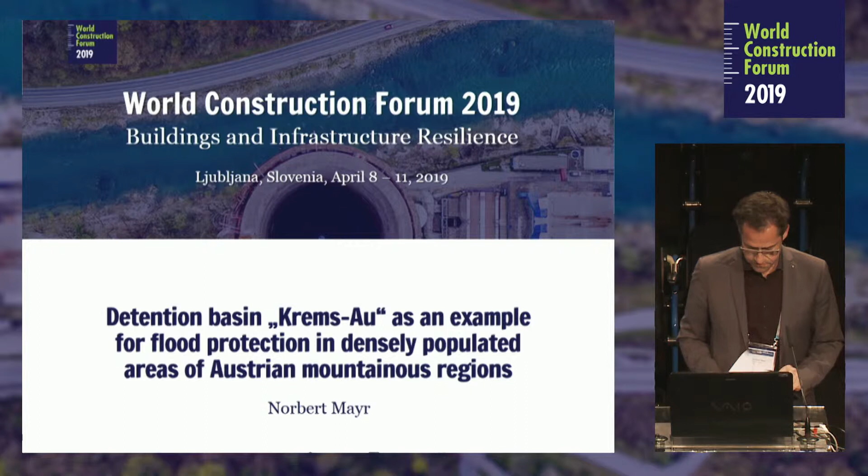Today I will tell you some hopefully interesting things before the coffee break about the project we are part of in designing and inspecting for almost 10 years now.

In 2002, a flood event in upper and lower Austria shocked the country. Many valleys in the foothills of the Alps that had been regarded as safe from submergence were flooded, and the economic damage was high since these valleys are very densely populated. One of these valleys is the river Krems in Upper Austria, where the river had been regulated in the 1960s.

After the flood, research for the reasons of the disaster was started and concepts were created. For the upper regions of the valley, a basin for flood detention was concepted. This is the reservoir Krems-Au, which I want to tell you about. One focus of my presentation is the hydrological dimensioning of the reservoir. The other one is aspects of safety and the construction and the Austrian Reservoir Commission. At the end of my presentation, you will see some photos of the building phase.

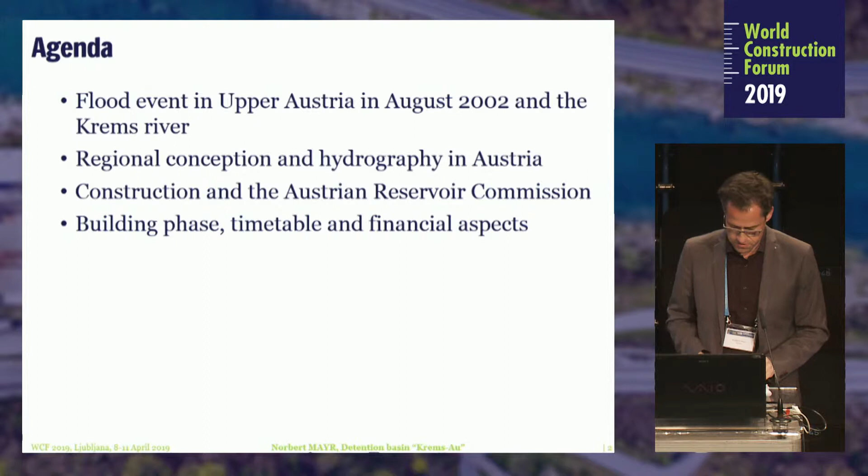I have already told you about the problems we have in these mountainous regions. The stream regulation measures of the 20th century appear as much too small. The floods in 2002 and partly also in 2013 have shown this. The challenges are to plan and build reservoirs for the mitigation of floods with dimensioning the necessary volume. The other challenge is the construction has to be safe up to very rare floods because of the dense population and industrialization in connection with the danger of flood waves that threaten human lives.

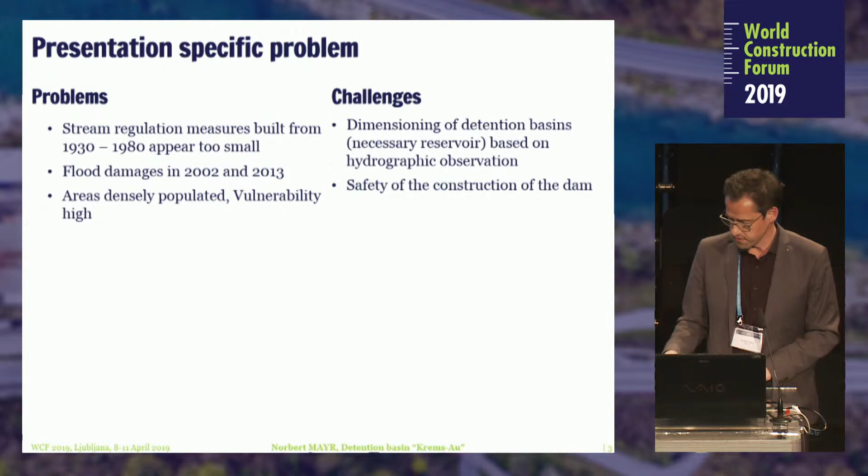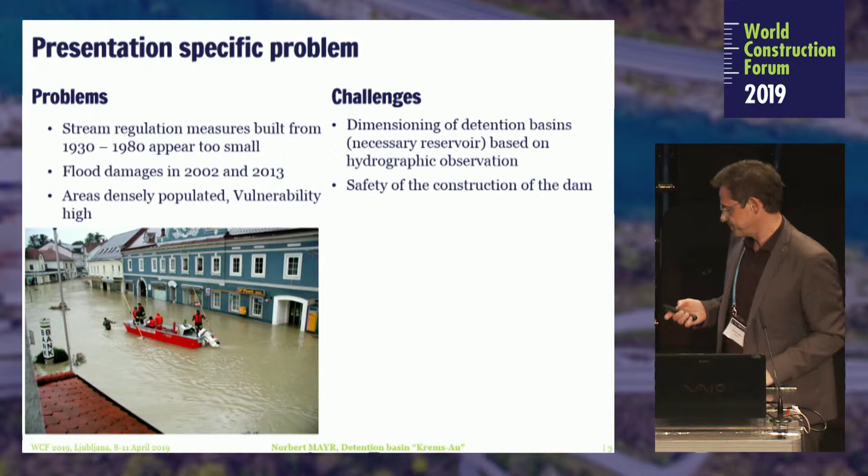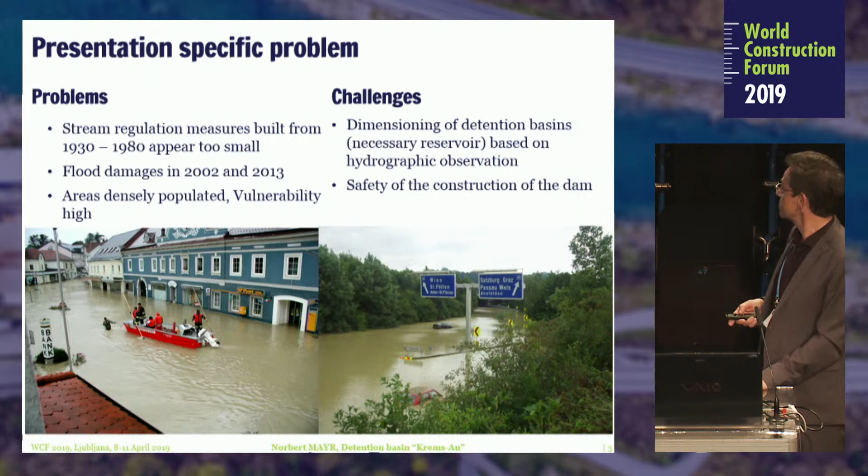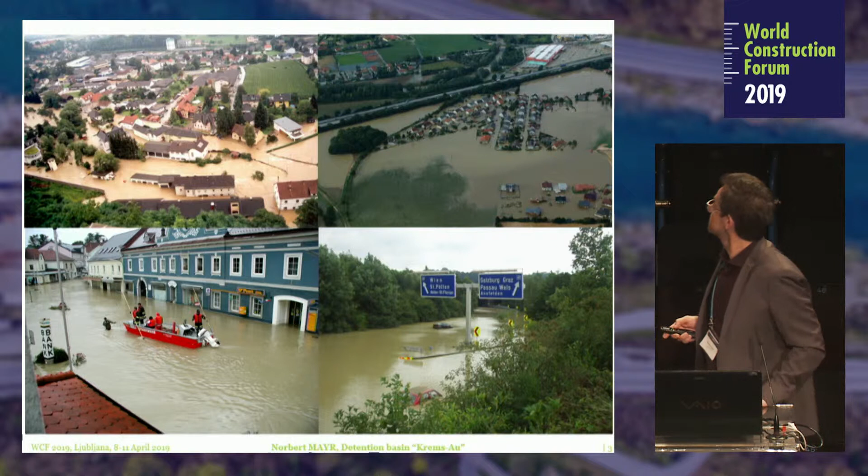Here you see some photos of the flood of 2002. This is the city of Kremsmünster. Here you see a picture of the A1 motorway, one of the most important motorways in Austria, that was flooded by the Krems. Here another picture of Kremsmünster and a settlement part of the city of Ansfelden.

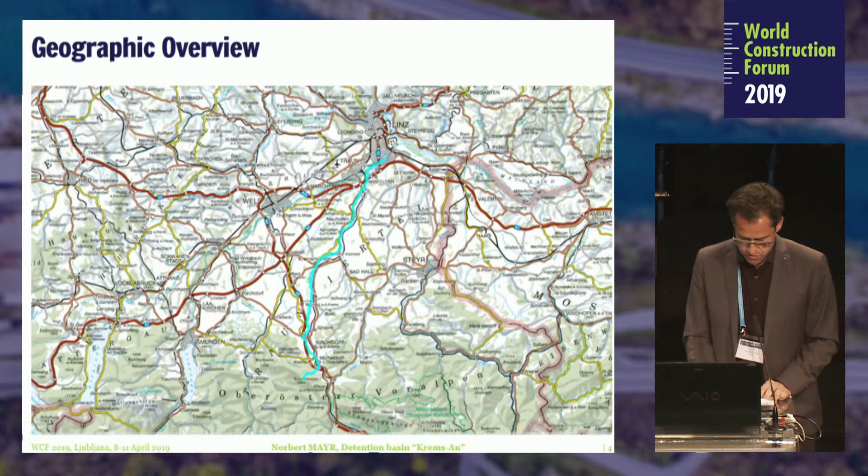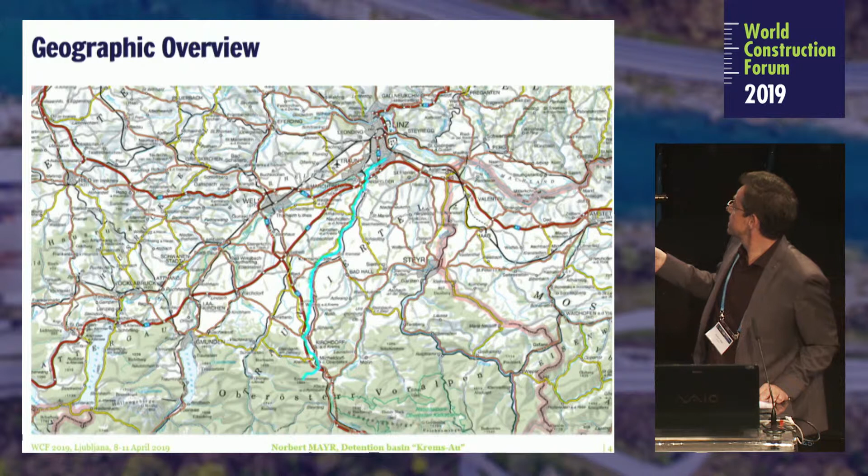A short geographic overview on this slide. You see part of Upper Austria with the Alps in the south, where the river Krems has its sources. Here you see the Krems River in light blue. The Krems flows here into the river Traun and on into the Danube. Here is the capital of Upper Austria, the city of Linz.

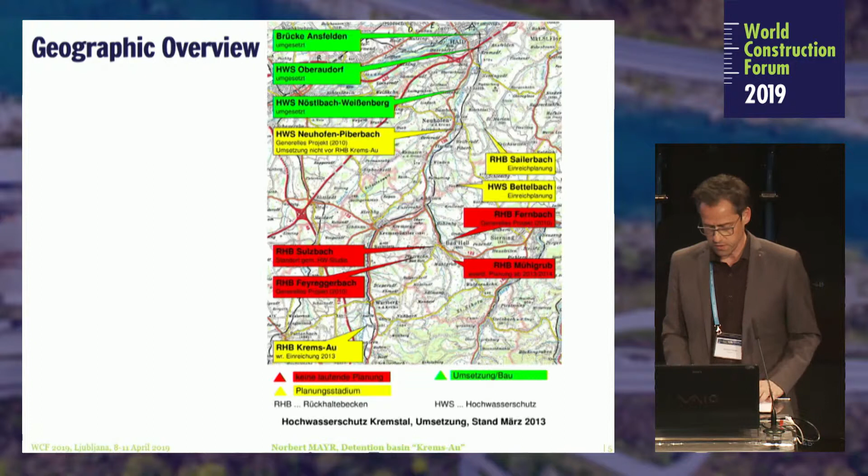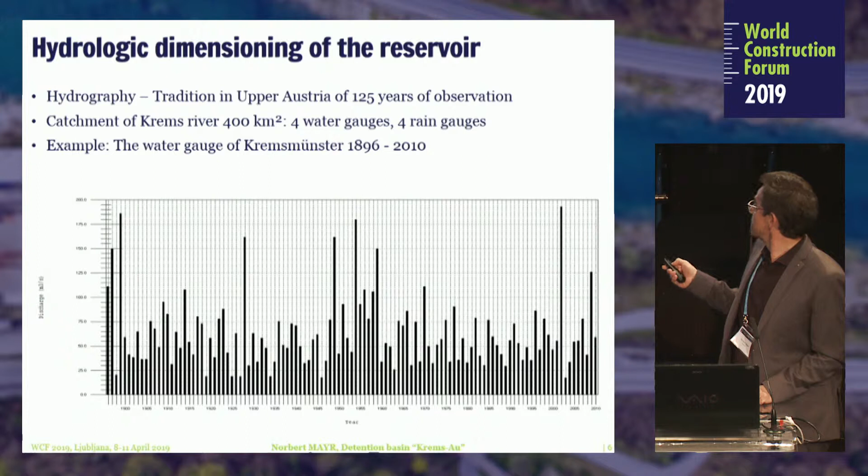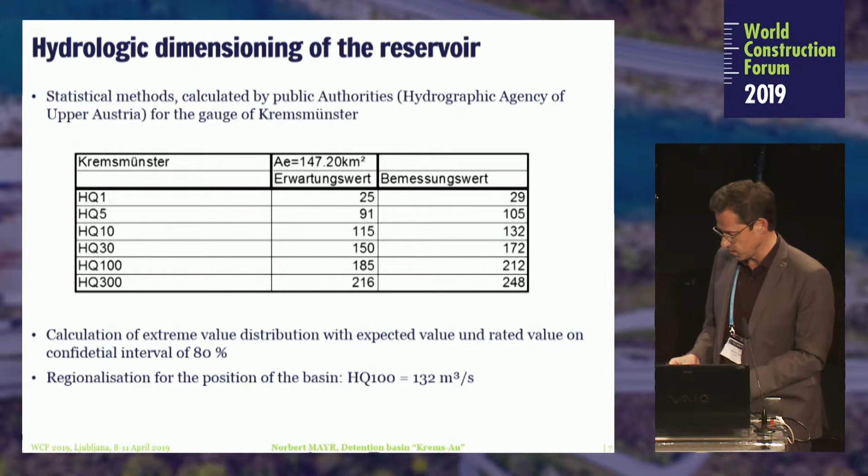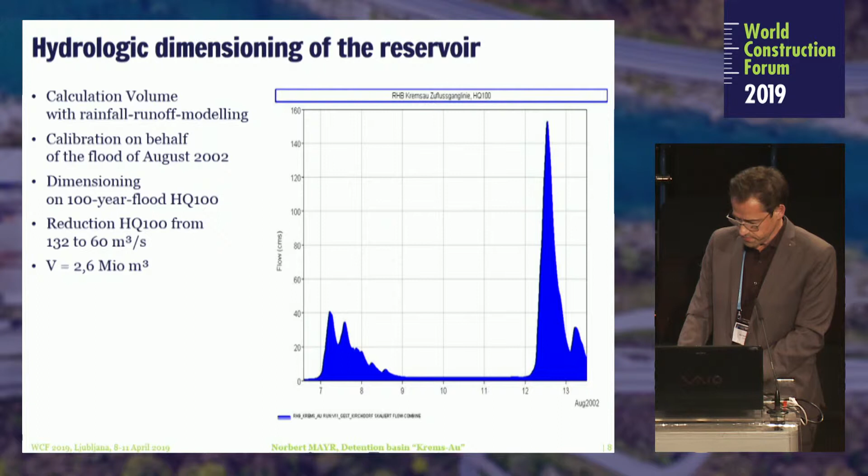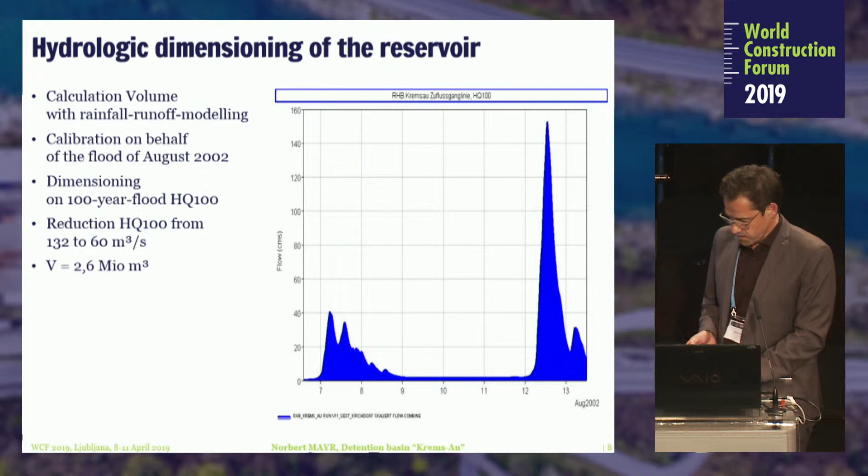The volume of the reservoir was calculated by rainfall runoff modeling. The model could be calibrated on behalf of the flood of the 12th of August 2002. The dimensioning of the volume was made for a 100-year flood, which is the usual annuality for flood management in Austria. The volume that resulted at the end of that process was 2.6 million cubic meters. On the chart you can also see the calculated hydrograph of the disastrous flood in 2002.

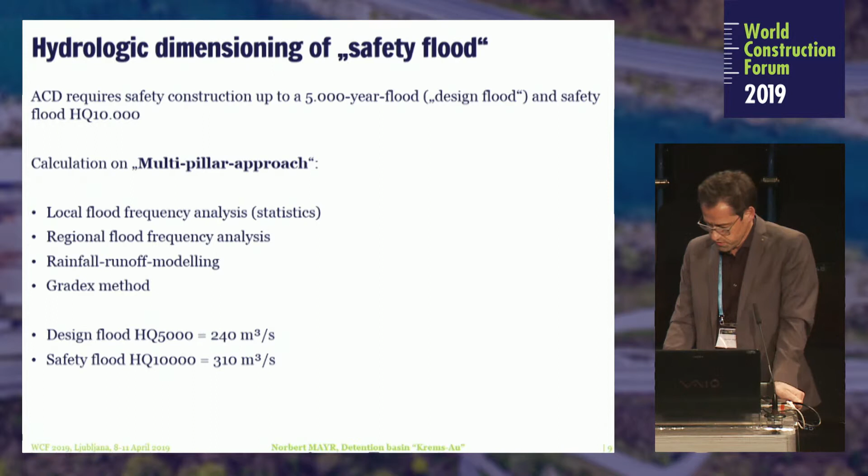For the safety construction of the dam, the Austrian Commission on Dams, ACD, requires calculating a so-called design runoff with an annuality of 5,000 and a safety flood with an annuality of 10,000. This calculation has to be made using a so-called multi-pillar approach. The runoff must be calculated by 4 different methods, and the results have to be discussed.

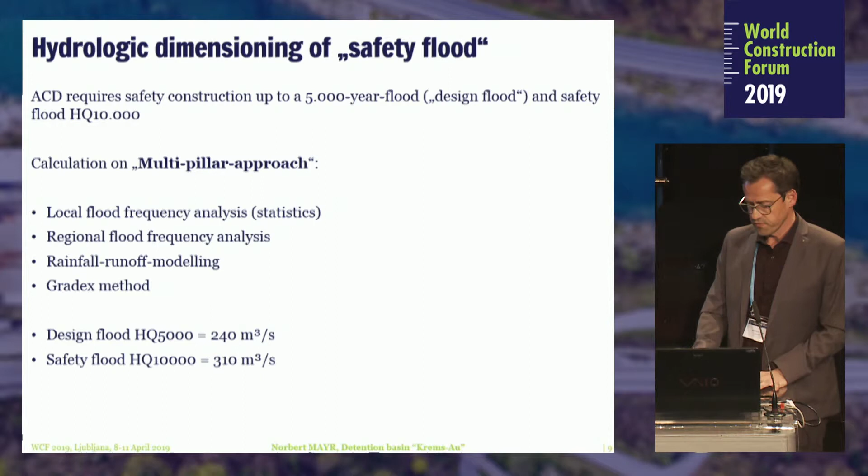In this case, we took the local frequency analysis of the water gauges Krems-Münster and so on, a completely statistical method; further, the regional flood frequency analysis, which is also a statistical method in general; further, rainfall runoff modeling; and the Gradex method. Here you see the results of the multi-pillar approach with a design flood of 240 cubic meters per second, nearly double the 100-year flood.

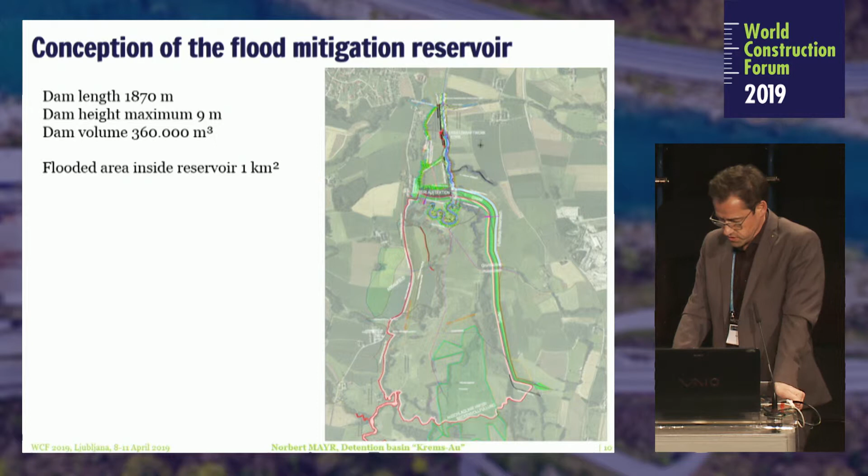So we come to another main chapter of my presentation, the construction of the dam and safety aspects. Here you see the dam with a length of 1,870 meters on the right side, on the east side, and with a height of maximum 9 meters here in the north.

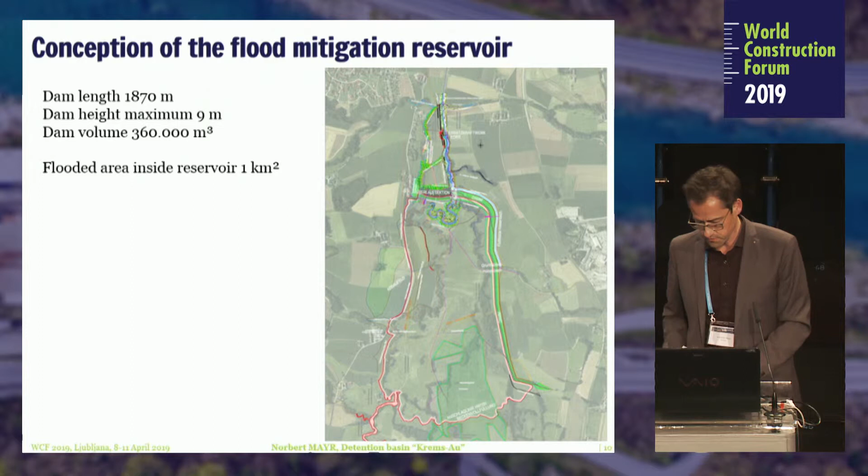The dam itself will have a volume of 360,000 cubic meters. You can also see the flooded area inside the reservoir with an area of 1 square kilometer and a volume of water of 2.6 million cubic meters.

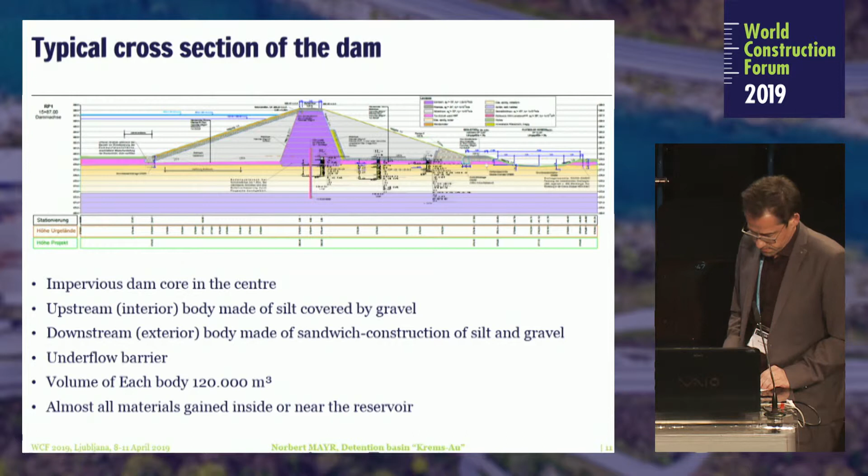marl in a depth of about 6 meters. The dam itself consists of an impervious dam core in the center, an upstream body made of silt covered by gravel on the upstream side, and the downstream body consists of a sandwich construction made of silt and gravel. To prevent undercurrent of the dam through the pervious gravel layer, we constructed an underflow barrier here by soil stabilization. The volume of each body is about 120,000 cubic meters. Almost all materials you see here can be won inside or very near the reservoir, so transport costs can be minimized.

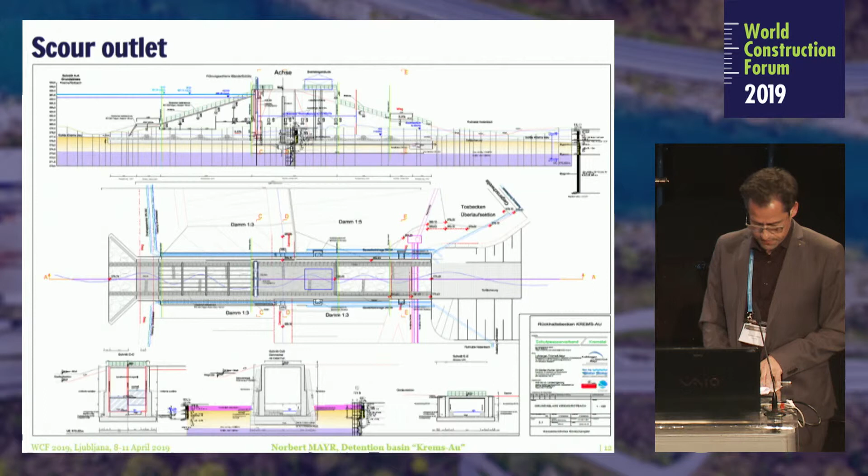These sluices are normally open and will be closed when the water level in the nearest settlement reaches a certain critical value. The outlet is exposed to daylight on most of the length of 72 meters, especially for insects and birds that fly along the water level and also for water organisms. The height of the outlet from the foundation to the top is 13 meters.

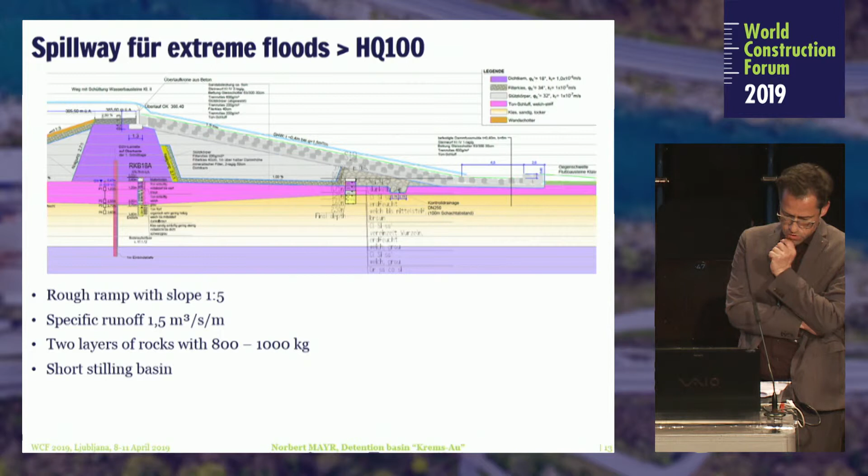On the top, we designed a wall of rounded concrete to reach a high wear coefficient, and on the slope we have two layers of breakwater stones, 800 to 1,000 kilograms, that have to be laid very roughly to dissipate the energy on the slope and not at the bottom. So the stilling basin here could be designed very short, just a few meters.

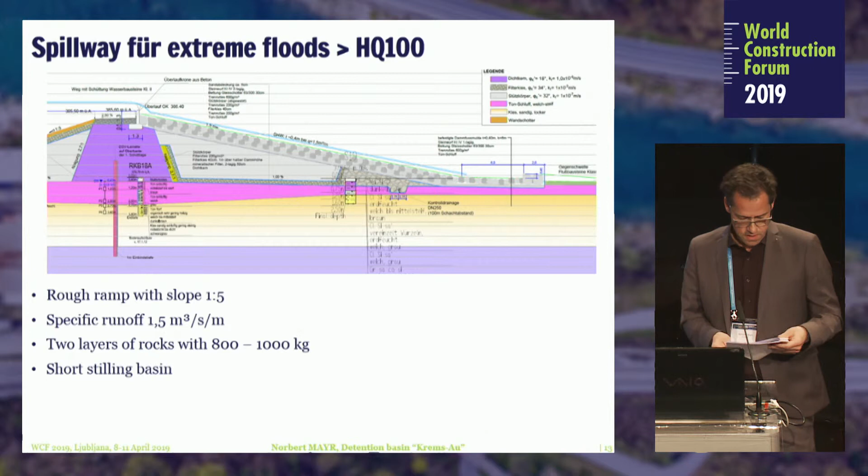Dams for water supply, flood mitigation, and irrigation reach back in Austria to the times of the Romans. In Austria, the building of larger dams now for energy production started at the beginning of the 20th century. In 1916, a failure of a flood mitigation dam called Weiße Desse caused many victims and led to fundamental guidelines

in 1917, in the middle of the First World War, and to the foundation of the Austrian Dam Commission in 1918. The ACD consists of a panel of experts of all fields of dam engineering, and following the Austrian water law, it has to be consulted in cases of projects with a height above 15 meters or with a reservoir capacity more than 500,000 cubic meters.

The ACD is administered by the Federal Ministry of Sustainability and Tourism. It has examined since 1918 about 150 dams.

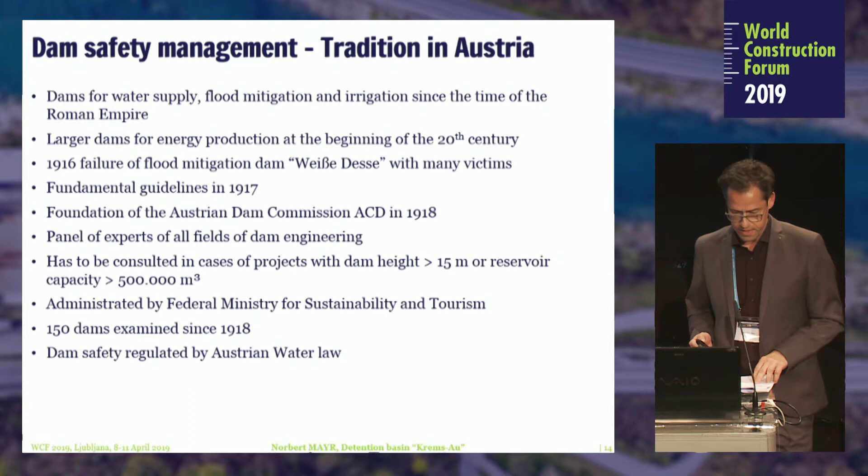Now, the authorization procedure starts by appointing a panel of a few experts of the ACD for certain important fields as geology, hydrology and hydraulics, dam design, analysis, and mechanical engineering. Their expertise is discussed in a meeting of the plenum of the ACD, and the final expertise is the basis for the stipulations of the authorization.

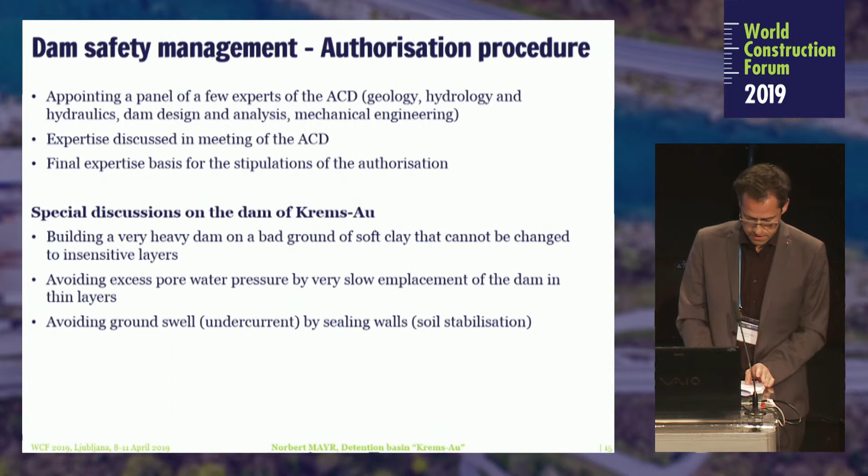Special discussions on the dam of Krems-Au were at first the building of a very heavy dam on a very bad ground of soft clay that cannot be changed to insensitive layers. Second, it was if and how excess pore water pressure can be avoided by very slow emplacement of the dam in thin layers. And third, avoiding groundswell by soil stabilization.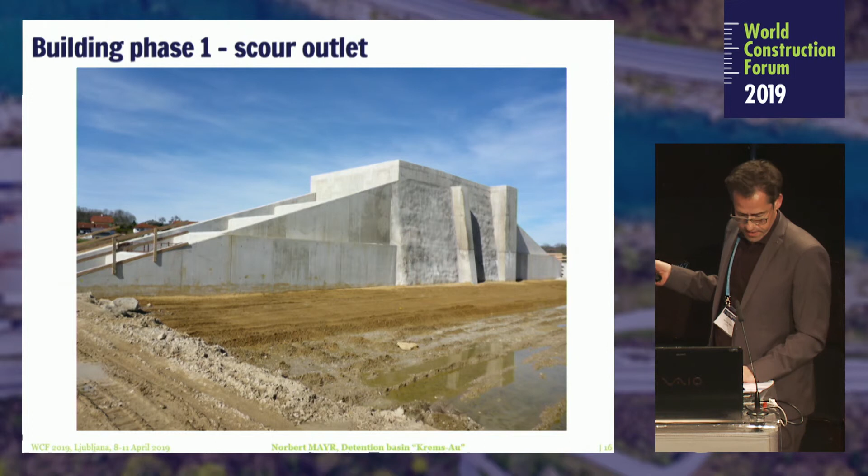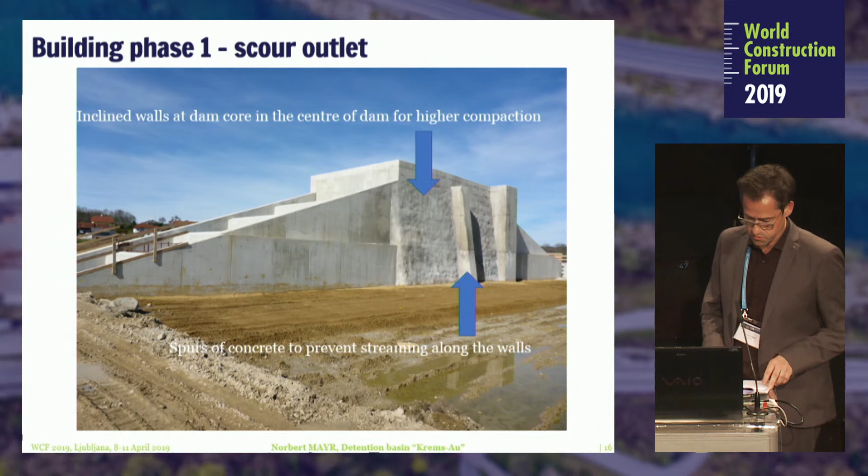On this picture you see the main scour outlet where the dam will be fitted to on both sides from this year to 2021. In the middle you can see the center of the dam with inclined walls for higher compaction and spurs of concrete to prevent streaming along the walls here.

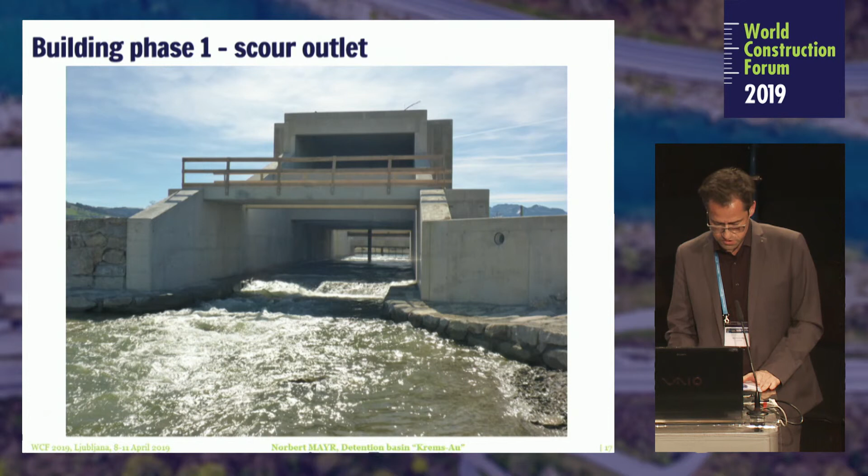Another picture of the scour outlet from downstream. In the center you see the two sluices with 12 square meters each that will be installed, and the whole construction will be passable for fish and other water organisms.

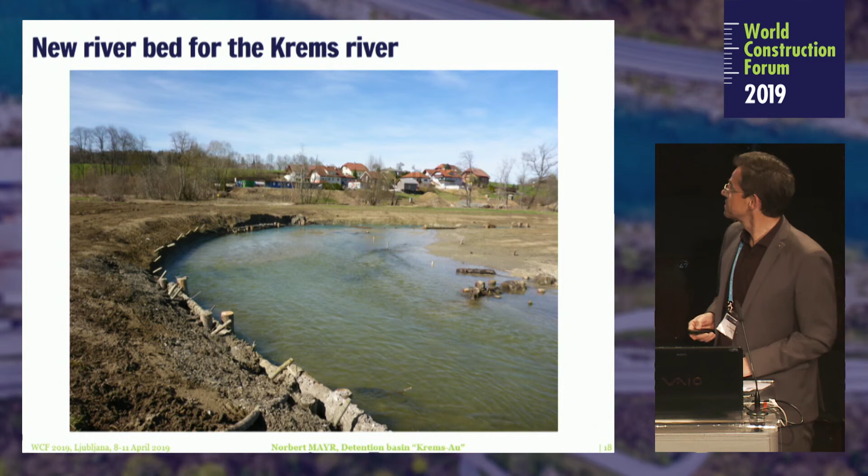The last picture is the new bed for the Krems River inside the basin, just a few days after flooding the first time, which we are very proud of.

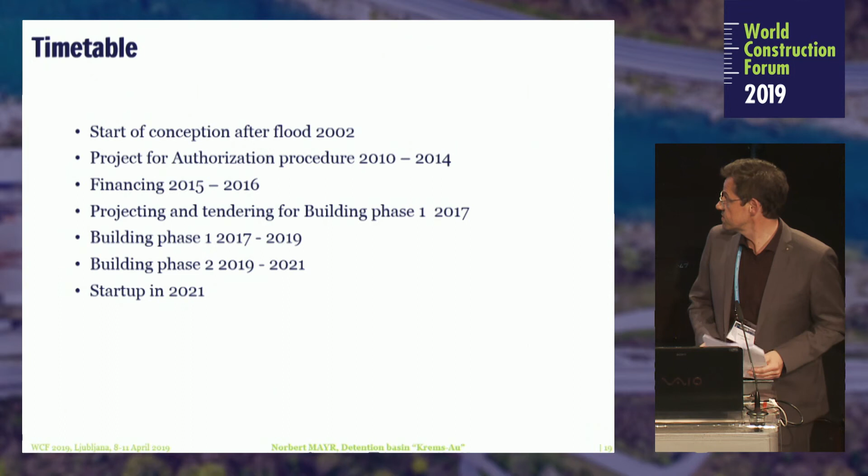I've told you some words about the timetable. The start of the conception was after the flood of 2002. The project for the Austria authorization procedure started in 2010 and lasted 4 years. Financing took 2 years of time until 2016. Now we have projected and tendered building phase 1 and building phase 2, which starts in 2019 in some weeks, and we hope to be ready for startup in

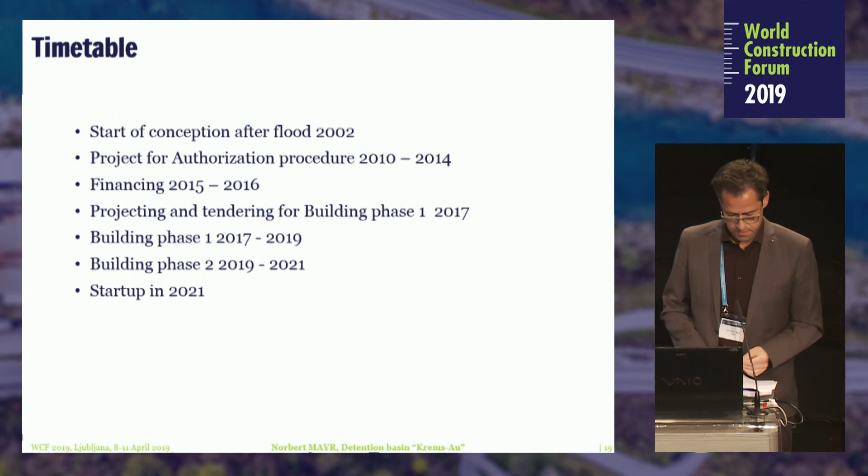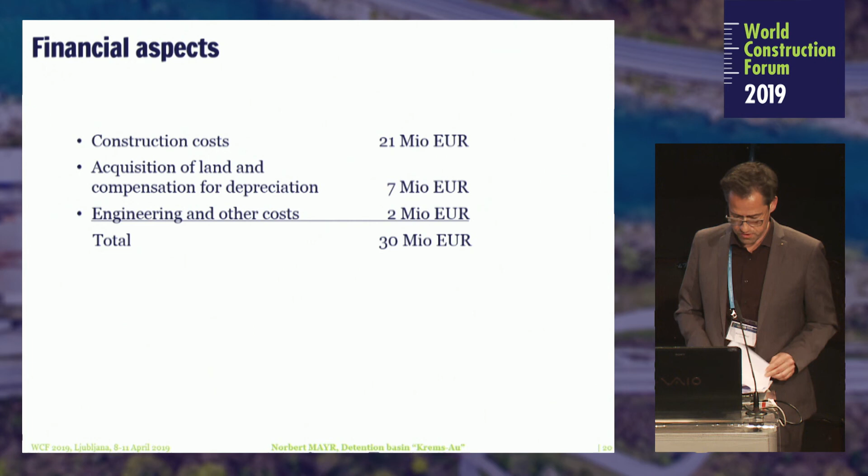2021. Some financial aspects at the end. The construction costs were calculated in 2015. Now, after finishing phase 1 and after tendering phase 2, we are optimistic to hold the budget of 21 million euros. And the building owner is also optimistic to hold the engineering costs of 2 million euros. And together with the acquisition of land, which took 7 million euros, the total costs are 30 million euros.